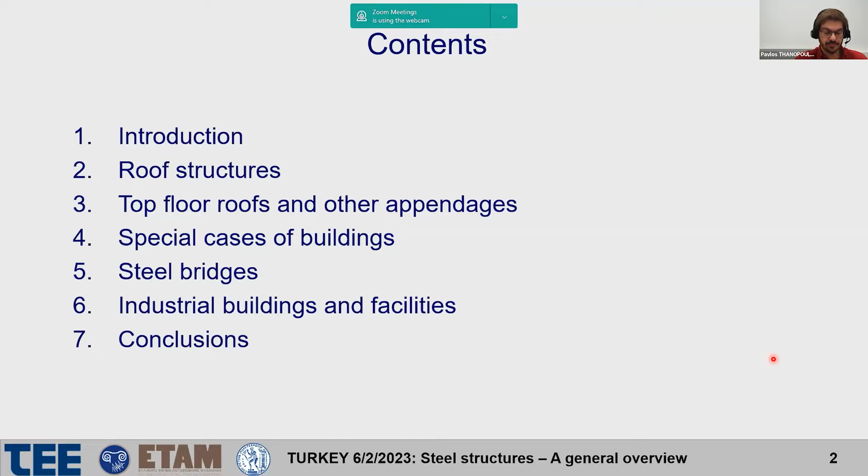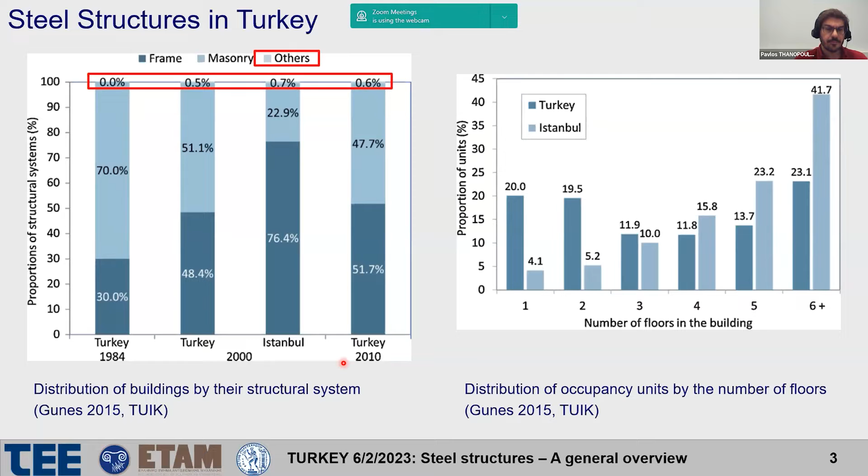Now, if we see this next slide, we can see in more recent data, there is a break. We can see how these buildings are divided in each category. In the left chart, we can see that for the new residential buildings, concrete is by far the most popular material, with structural steel structures claiming only a mere 0.2%, and as residential buildings comprise 85% of the total buildings, we understand that this is the major share of the market.

As expected, things are a little bit better for non-residential buildings, where steel, seen here with the orange line, can be seen claiming 10% of the market of the remaining 15% of the total buildings. By the term non-residential buildings, we include all other uses like commercial, industrial, cultural, administrative, educational, etc. On the upside, we can see that there is a clear trend of the steel structures claiming a bigger part of the market, which could help improve seismic performance in regions like the ones we visited.

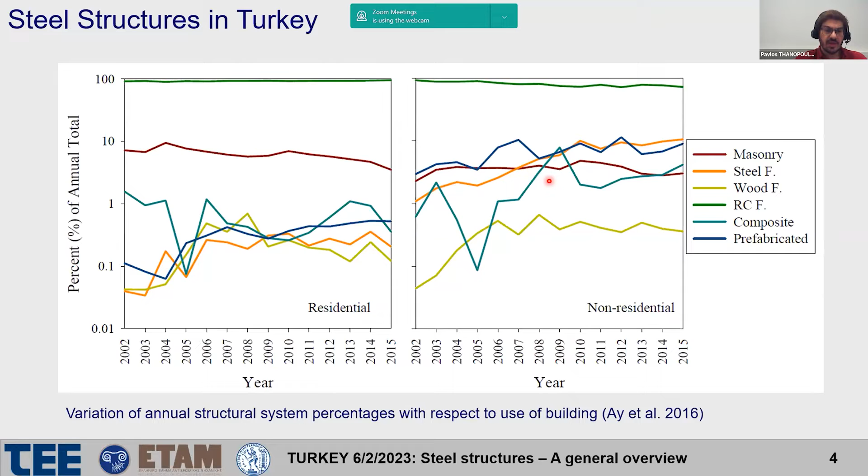To that end, we can see what happened in the previous earthquake, like the one in 2003 in Bingöl, which hit with a magnitude of 6.4 and resulted in 625 collapses with at least 177 fatalities. 84 of these fatalities were due to the collapse of a dormitory block in a boarding school, while more than 90% of the schools were affected with 4 collapses. Here we can see in this slide one of 21 schools with identical floor plan, which collapsed. Here there is a missing story due to shear failure of the columns.

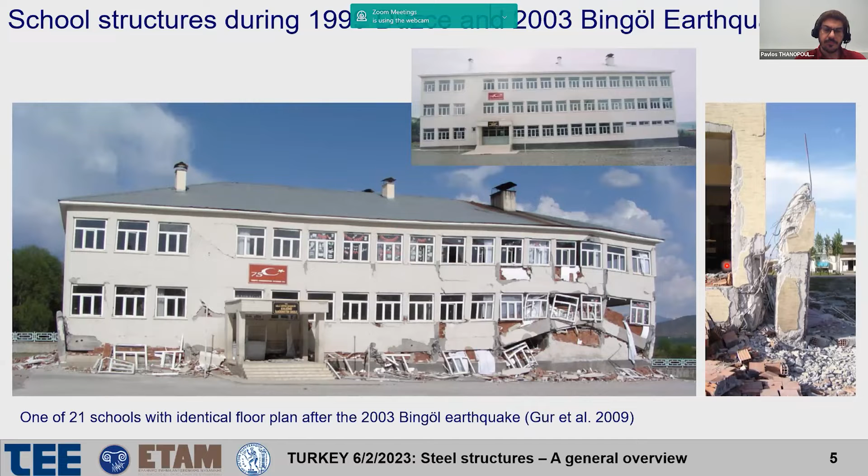As a result, an innovative pilot modular school was built in this area in 2006, as we can see here on the left. Or more recently, we can see this steel school, which was constructed in Istanbul in a record of 72 days, covering like 1,600 square meters.

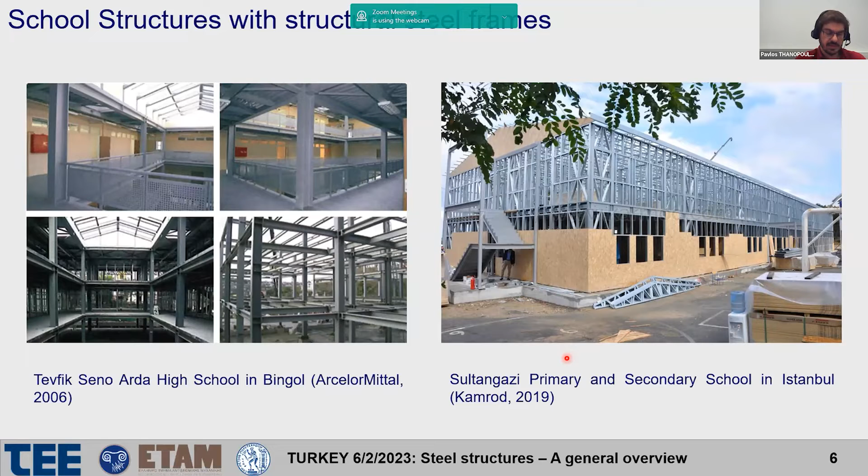So we have discussed seismic isolation of hospitals, but as it wouldn't be easy to put seismic isolation in most buildings, perhaps some buildings could be considered to have steel as a solution to achieve better seismic performance. After this small introduction to steel structures in general, let's see the ones we observed during our missions.

I'm not sure why this is not moving. Okay.

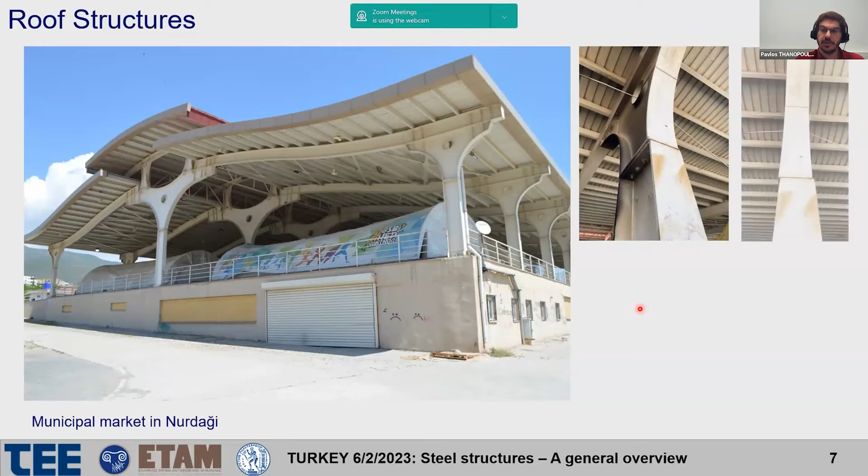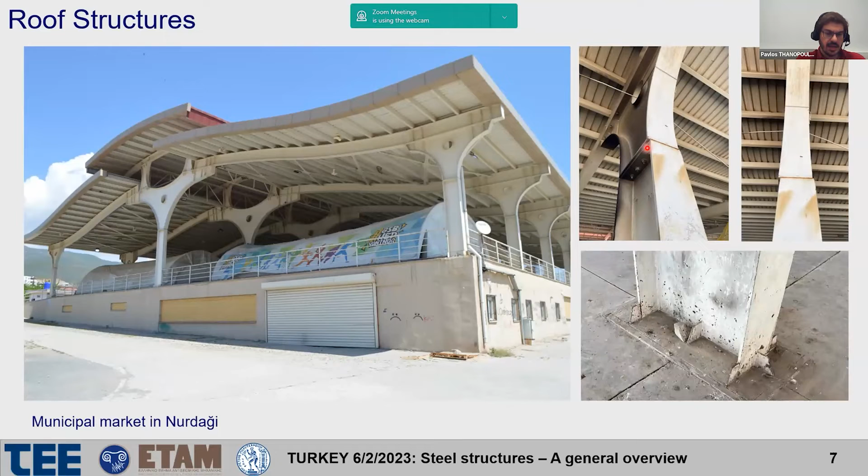We observed the permanent deformation seen here, a lateral deformation, but this was probably prior to the event, as rust marks attest. The only damage that we could identify that could be from the earthquake was this surfacing of the anchor at the corner node. You can see here from afar and here in detail, which was probably due to insufficient cover and absence of reinforcing steel. As the structure remained safe and fully functional, it was used to cover tents, which provided civil services, a function which was of paramount importance in the regions that were hit.

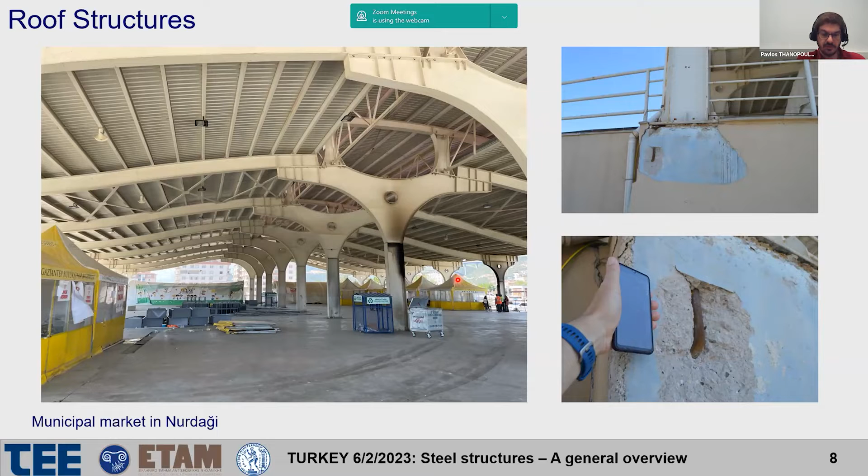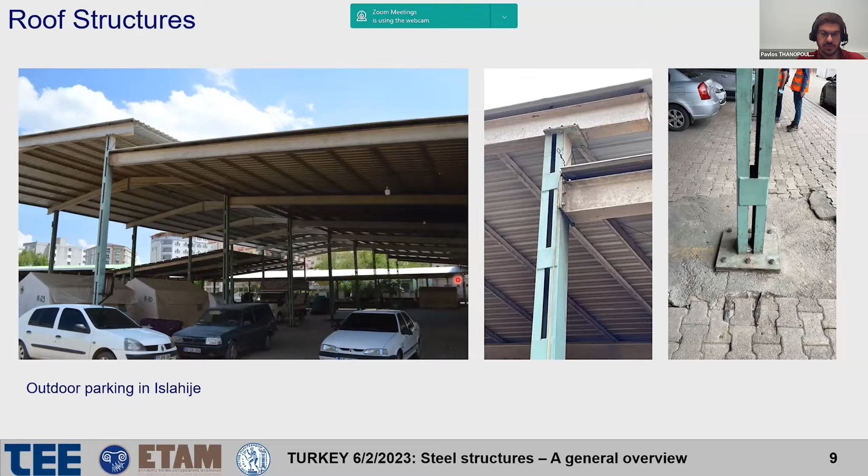We witnessed a very well organized effort from the Turkish authorities to aid the people that were suffering due to the earthquake. Another example is this outdoor parking in Islahiye, if you excuse my Turkish accent, which also remained fully functional, with the only damage that we could observe coming from falling debris from the adjacent building, as you can see in these two photographs.

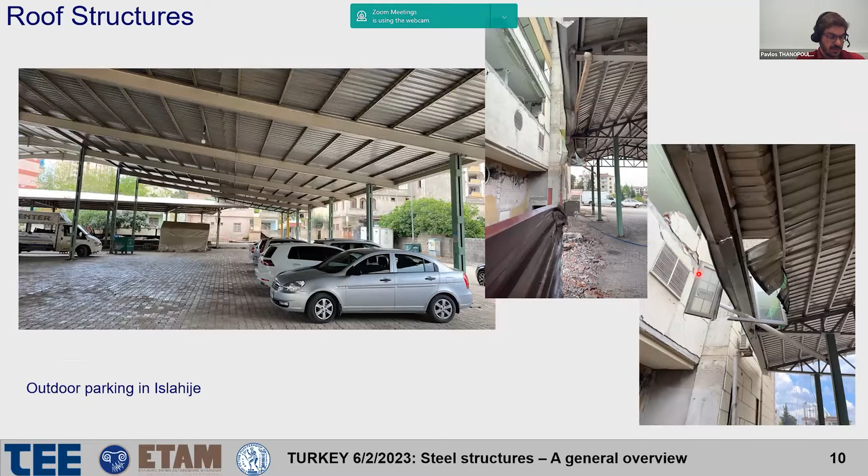As I said in the start, we recorded a lot of multi-story buildings, but unfortunately none of them was steel. However, normal practice was to have a steel roof here at the top. So this was a detail that we saw in several buildings in most of the cities that we visited. These structures behaved rather well, especially if they were connected to a concrete part in the center of the floor plan, which could be used for access to the roof.

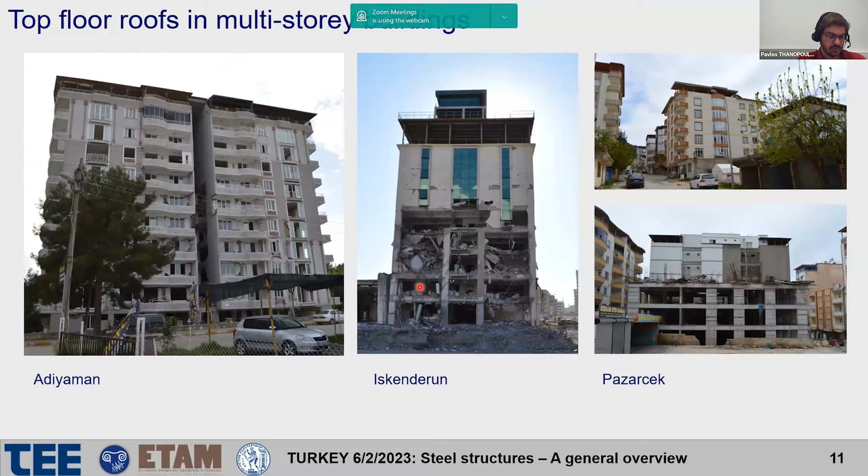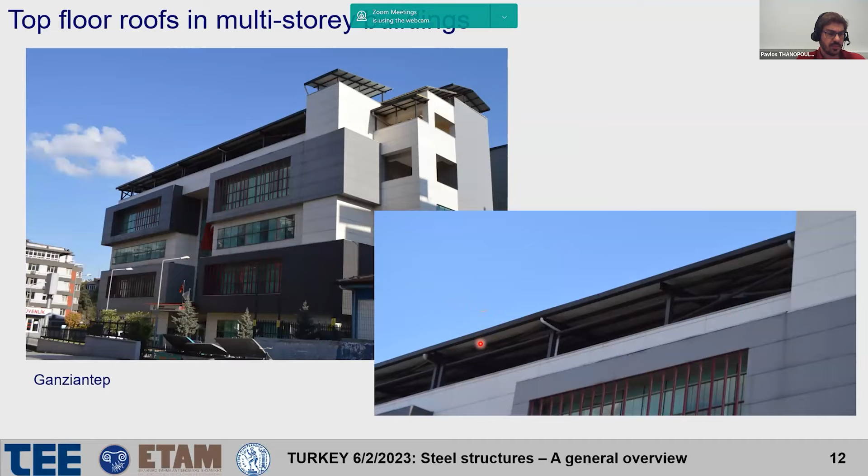So even in buildings that were heavily damaged, and despite the increased spectral acceleration of the top floor, this structure behaved relatively well. This was even better for such code designed structures. Here you can see more stiff braces and a structure of better quality. Although this building in Gaziantep was probably not hit by the earthquake so hard.

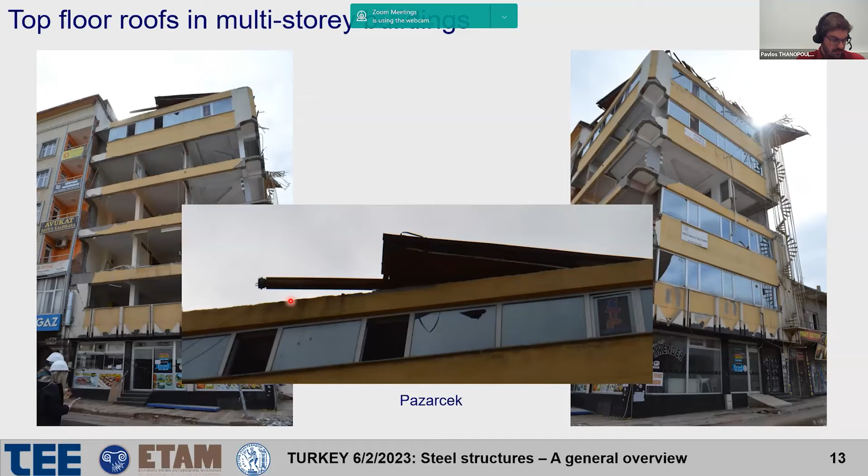Nevertheless, we did observe some failures. In this building in Pazarcik, we saw total collapse of this structure. The building, as you can see, is severely hit by the earthquake, but failure came here mainly due to lack of anchorage and absence of bracing, which would provide maybe alternative stiffness. So this structure, although not critical for the building, could cause serious injuries if it came down from 5 stories above.

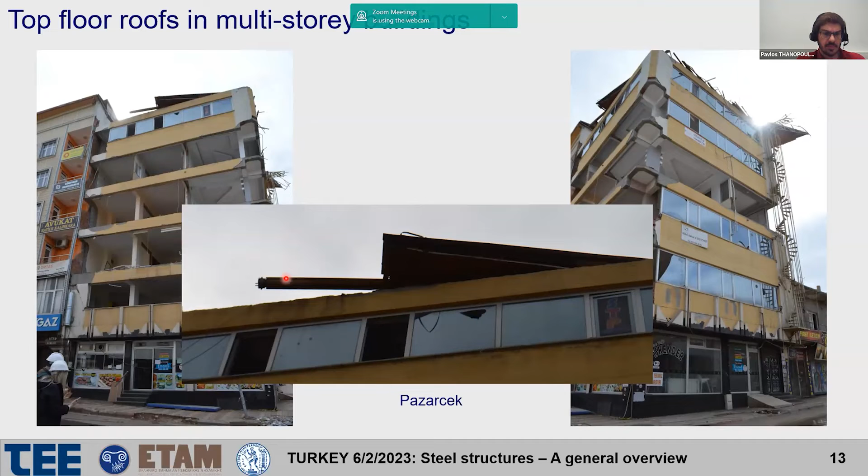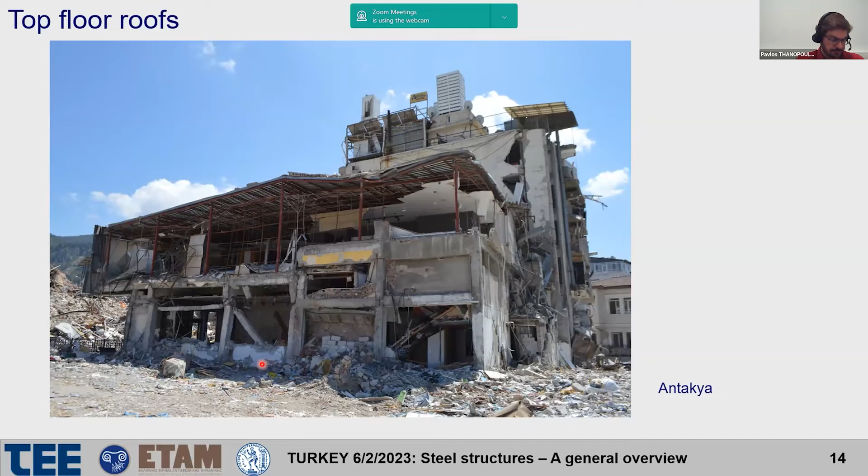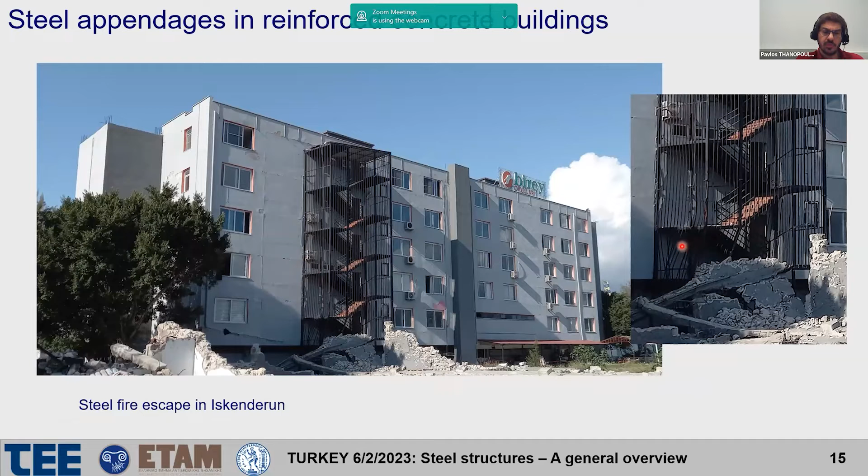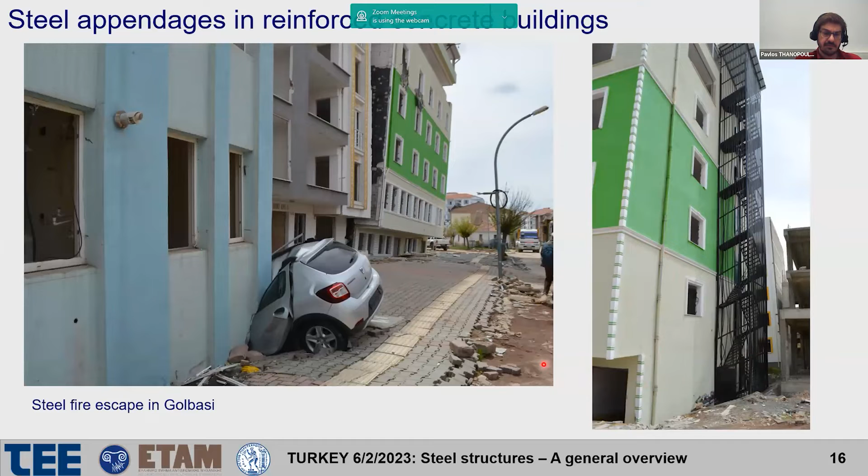And if you are thinking, why do we need a fire escape after an earthquake, we can see this building with a light green color in Gölbaşı, which, as the speakers before me told, suffered severe deformation, settlement, and permanent inclination, which completely destroyed the fire escape, which would be useful after the submersion of the building in the ground as an alternative exit from the building.

We also recorded one case, it wasn't very common, at least in the regions we visited. We recorded the case of a building in Antakya where it was retrofitted with steel frames in the second story. Although the structure did not collapse, we can see that all the plasticity demand concentrated in the second story where the steel members were implemented, and all the infills were completely destroyed. So although the structure did not collapse, the repairing of this structure would be challenging, to say the least. It's probably beyond repair.

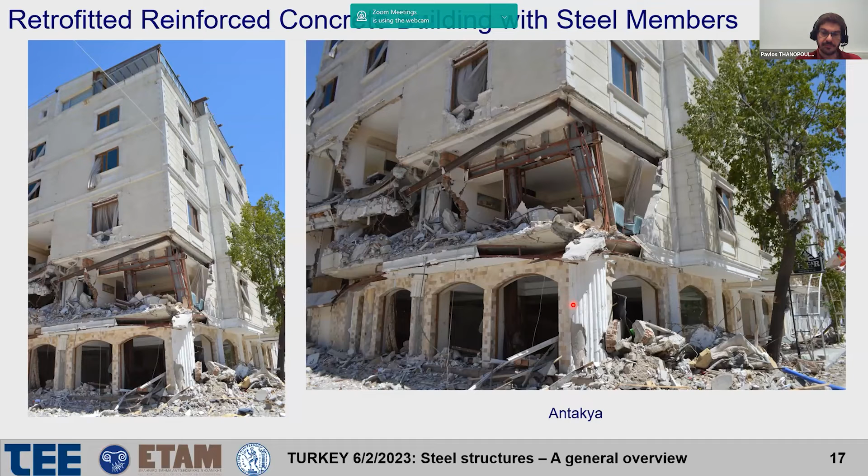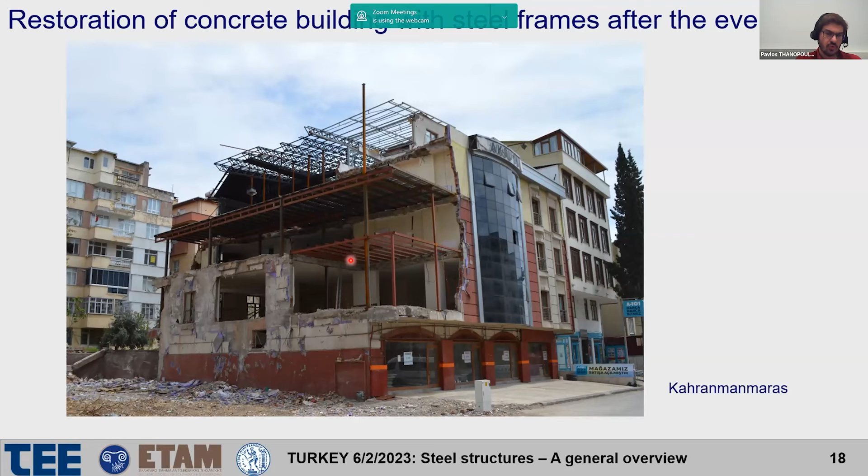A different case was this building in Kahramanmaraş, which, to the best of my understanding, suffered damage from the adjacent building that collapsed. By the time we visited, all the damaged sections were removed, and the steel frame was placed in their place in order to restore the building to its previous functionality. So it seems like restoration was in progress.

On my last note on buildings, I would like to mention the once picturesque Kurtuluş Avenue in Antakya, which probably was the city that suffered the most on February the 6th. There we can see a lot of variation of this special type of building, a two-story building with the characteristic projection of the second floor over the ground floor.

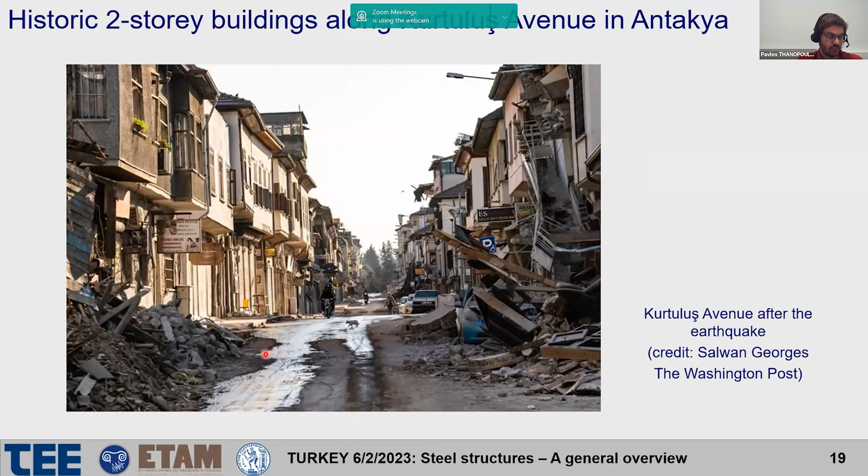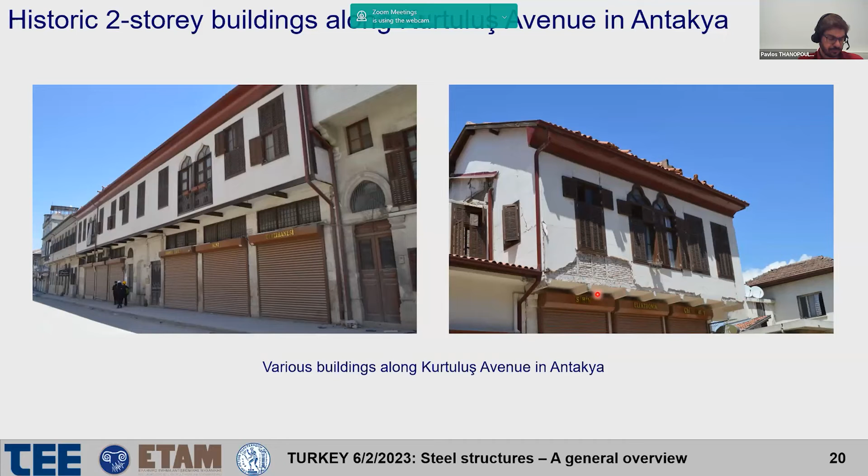These buildings of the early 20th century consist mainly of masonry or brick outer walls with or without timber elements. Most of their slabs at the top of the ground floor were reinforced concrete slabs supported by steel I-beams, which also support the cantilever. These structures sustained varying levels of damage, from negligible, as we saw before, to total collapse, in which cases you can see the steel members exposed after the collapse of parts of these structures.

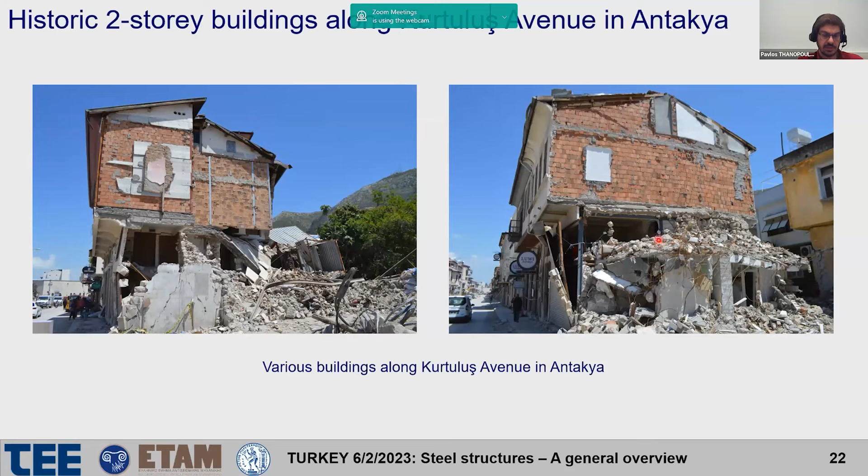At the time of our mission, it was not easy to identify clear causes for this varied behavior, other than possible differences in quality of construction and the unfavorable response of the corner buildings. As you saw, these buildings are in touch with each other, so corner buildings seem to suffer more than the remaining ones. Given the historic architectural nature of this street, further investigation and the restoration of these buildings would seem necessary.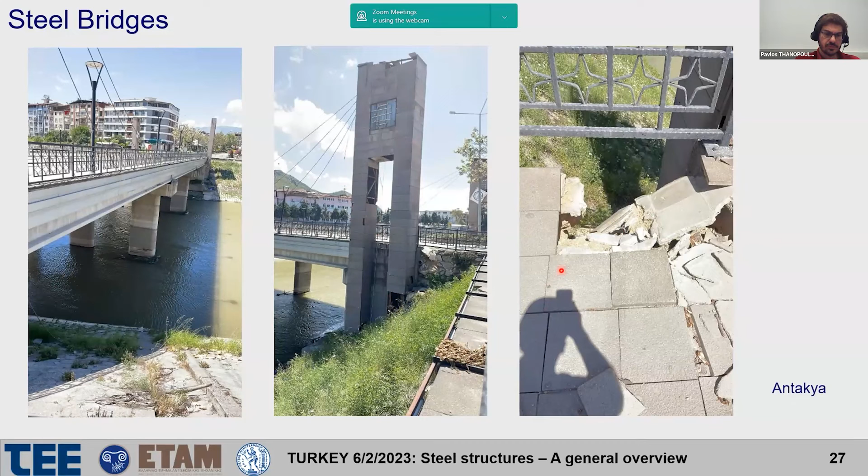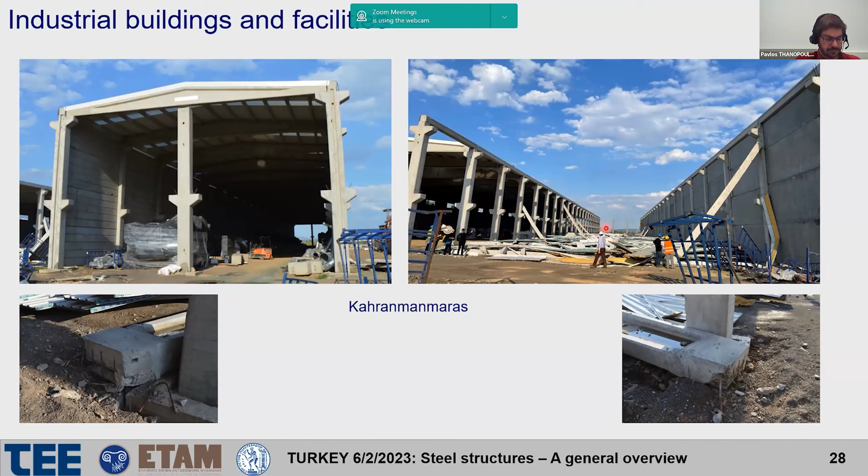However, we did see some steel industrial buildings. Most of them behaved quite well. We did see damage in the non-structural elements like the panels and purlins, but nothing very serious. However, we did see several structures that were built rather based on experience than design.

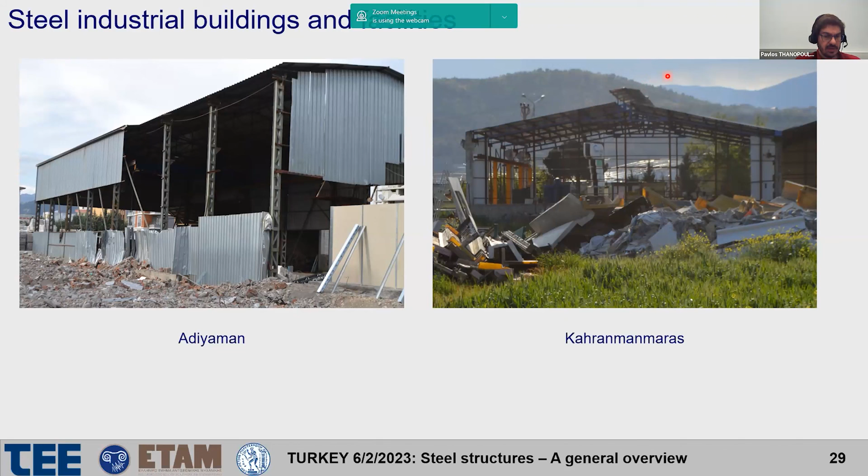And in the course of our travels, we did see steel structures collapse. So it should be investigated if these were indeed code-designed or not. Here another one, and the same goes for other industrial facilities. We did record some silos and tanks that were fully operational and without any significant damage.

This was from me. I will not bore you with my conclusions, as I have mentioned most of them already. The basic one is that steel structures should be explored as an alternative to improve seismic behavior in Turkey.